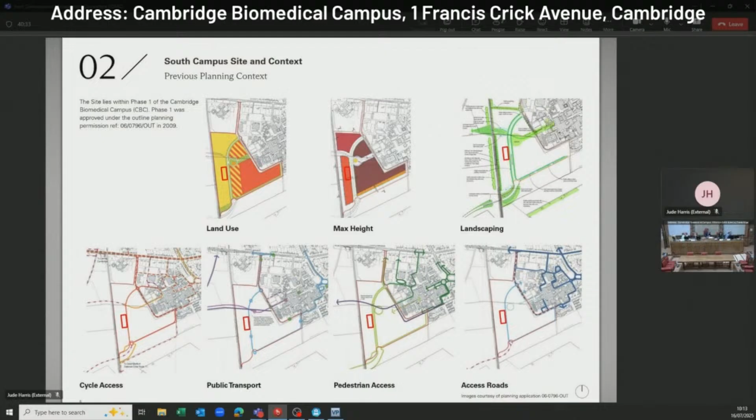Just 3 quick slides from me to place this in a planning context. The site for the building is within the area of the original phase 1 of the Cambridge Biomedical Campus, which was first granted outline planning consent in 2009, along with its parameter plans - a snapshot shown here - that have guided and controlled the delivery of phase 1 across those topics. That 2009 consent expired in 2021, which I'll come back to.

Since 2009, there is a different context. Phase 1, large parts of it now already built out. Phase 2, consented and currently being built out. Phase 3 is allocated to the south, and phase 4 is the emerging allocation in your emerging joint local plan. Just to be clear, because of the scale, you may not be able to see the key which shows this.

Jude, if you start - so it runs north to south. Phase 1 there is the large green area; that essentially is the original 2009 planning consent area. Phase 2 is the land that sits underneath Dame Mary Archer Way, the yellow rectangle - you'll see the cranes and development on there now. To the south of that is the allocation within the South Cambridgeshire District Local Plan generally called phase 3, no planning consent yet but allocated. Phase 4 is the bigger red land coming forward as the idea in your emerging joint local plan.

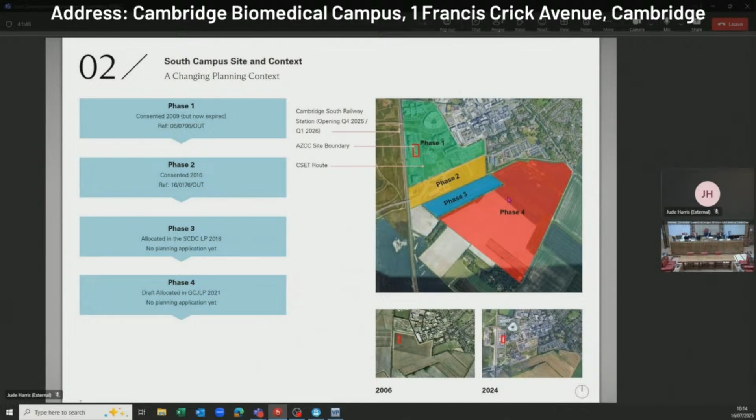The adopted and emerging policy position supports appropriate development at the biomedical campus, along with the direction given by the recently adopted SPD for the campus, which we very much note. Because that 2009 consent has expired, the proposals today will in time form a full plan application rather than a reserved matters application, as you would have become accustomed to on the campus. Whilst such a new application is no longer technically bound by those 2009 parameter plans, we're nevertheless guided by them and what they always foresaw for this part of CBC.

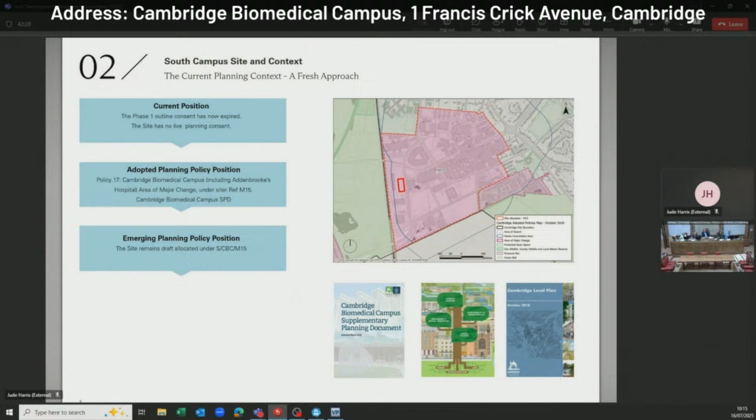Thank you, Guy. My name is Jude Harris, from Nicholas Hare Architects, and we're working on the project in very close collaboration with Herzog and de Meuron, the Swiss-based architects responsible for the DISC building, which you'll be familiar with and which has recently received a national accolade, an RIBA National Award. Thomas Ladd from Herzog and de Meuron sent his apologies today, so I've been asked to present their proposals in his place.

So what you see here is an aerial view of the master plan that Richard described, intended for what is called the South Campus. The North Campus is the DISC building. The South Campus is the buildings located on the western side of Francis Crick Avenue, between Francis Crick Avenue and the railway line into Cambridge. The building in the foreground, labelled number 3, is what we call the RFB building, the Rosalind Franklin Building. It came forward as part of a reserved matters application and was entitled the Enabling Building.

The Hub building, which is AstraZeneca's public facing facility with catering facilities that are publicly accessible and other facilities to support AstraZeneca staff, is located here as number 1.

The Sustainable Travel Hub, which contains a substantial number of cycle parking spaces and car parking provision for all of the 4,000 AstraZeneca staff, is located on the south side of the South Campus.

And the Energy and Data Centre here is number 5, which supports both the South Campus buildings, but also the DISC building with energy and data services across the campus.

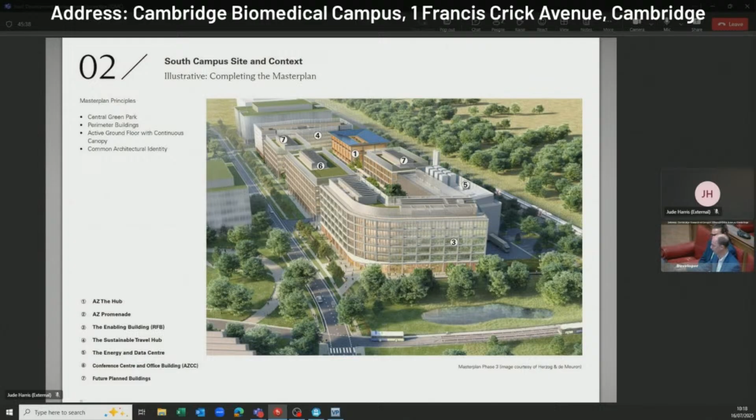So that's a little bit about the master plan and its history. In terms of looking at the site specifically, it's the rectangle labelled 6 here.

The forecourt to the station that you just referred to is located here. The DISC building is here. The LMB building you'll be familiar with is here. Royal Papworth Hospital is number 9 here. The Heart and Lung Institute was recently completed on the eastern side of Francis Crick Avenue, and we are on the opposite side of Francis Crick Avenue to that.

Number 3 is the building currently under construction on the site - that's the Rosalind Franklin building. And the central promenade area is this green strip in the middle, which we've described.

The vehicular access onto the site is very much in this southeastern corner, and then this is the sustainable travel hub that we've talked about. So that's the site in terms of its location and context.

We're obviously considering all of the various access routes around the site. You'll be familiar with the busway, which goes over towards Trumpington Park and Ride. Francis Crick Avenue is subject to the CSET proposals, which are being developed and will come forward as part of a future application. AstraZeneca have been in close dialogue with CSET to make sure that the requirements of this South Campus are not compromised by that.

And then the vehicular movement around the biomedical campus you will be familiar with, and obviously providing appropriate facilities for cyclists in terms of routes through and adjacent to the site, but in particular cycle storage on the site itself.

Deliveries will arrive via the western car parking area - people come into the site at the southeastern point, they come south of the Sustainable Travel Hub, and we have a small amount of surface parking on this western edge. Then we have a delivery facility to the west of the RFB building, which is a centralised logistics hub for AstraZeneca, and they then manage deliveries and distribution across the site via sustainable means using electric vehicles and other means.

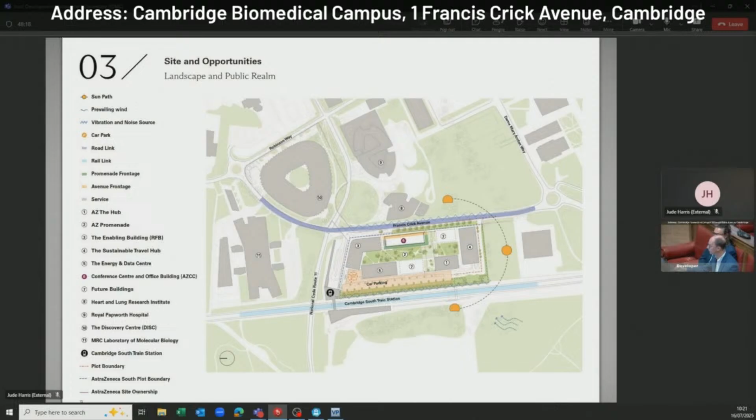So that's the landscape and public realm aspects. That's the site itself. Turning now to the process that we have been through responding to AstraZeneca's brief.

As Richard's talked about, there's very much been identified a need for conferencing and meeting facilities on the campus to enable that collaboration both with AstraZeneca staff internally, but also with the wider scientific community, both on the biomedical campus within Cambridge itself, and indeed nationally and internationally. The key part of the brief was the identified requirement for an auditorium for up to 450 people.

There are actually very few facilities within Cambridge that provide facilities at that level. The university has 2 large lecture theatres of that size, one at the Ray Dolby Centre, where we were the architects, and one at the Babbage in central Cambridge. So this will be one of 3 very large lecture facilities provided within Cambridge.

The work that we did with Herzog de Meuron was very much about responding to the brief, which is primarily a workplace building for 730 AstraZeneca staff, but with an additional function of providing this conferencing space for up to 650 visitors to the AstraZeneca campus.

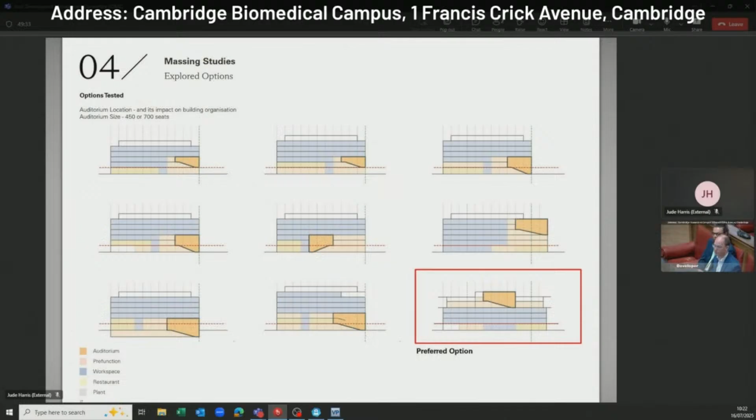An auditorium is a big volume, and so we looked at, do you put it in the ground, do you put it on the bottom, do you put it in the middle of the building, or do you put it on the top of the building? We very much settled on the option that we're going to present to you today, with the auditorium located at the top of the building as a penthouse on top of the workplace floors.

Mr. Harris, just briefly, I said you had 20 minutes, but I appreciate that's going to be very tight given the amount of detail. And if it suits you to slow down the presentation and take a little bit longer, then I'm happy to use my chair's discretion to do that. If you're happy with that, that'd be very much appreciated, Chair.

Thank you. So in terms of the site massing, the plot is about 75 metres in length and about 25 metres in width. We're obviously providing the main entrances at ground floor. The primary frontage and the access into the building will be from the west via the promenade landscaping.

You then come into the building and we have 2 primary functions: one vertical core to enable conference visitors to get to the upper floors, and one vertical core dedicated to AstraZeneca staff to enable them to access the workplace floors. You then have the workplace zone, which is shaded in blue here.

On top of the building, you have this magnificent large auditorium for 450 people, which is very much a kind of jewel at the top of the building. Adjacent to that we have what we call pre-function space, which will include breakout areas, opportunities to have poster sessions to display scientific papers, and also large meeting rooms that enable slightly smaller presentation spaces than the big auditorium itself.

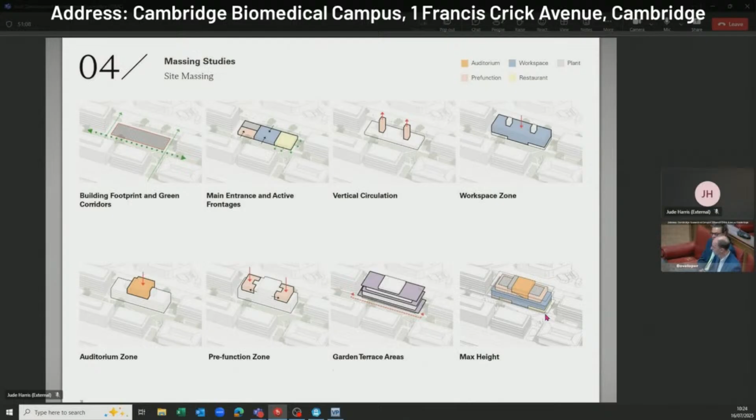You'll see from the visuals that we present later on, we're proposing garden terraces, both at the first floor and the upper floors, which provide an element of external space to the building, both for the people that work in it, but also for the conference visitors. Finally, the heights of the building, as you'll see as we present the scheme later on, are very much in tune with the adjacent massing of the master plan that was intended, both in terms of the RFB building, which is progressing for construction, but also the developing areas.

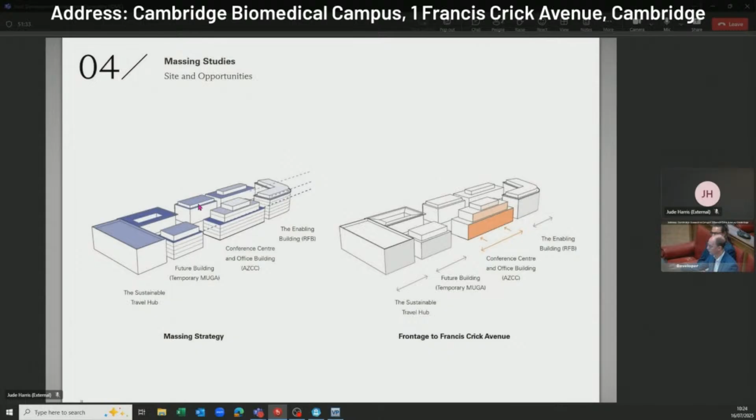So this gives a flavour of that massing. It highlights on the right this kind of frontage to the east of Francis Crick Avenue, but the massing very much complements the massing on the campus, both as constructed and as intended. You heard me talk about these two future buildings, one currently on the site of a temporary multi-use games area, and one between the amenity hub and the energy centre itself.

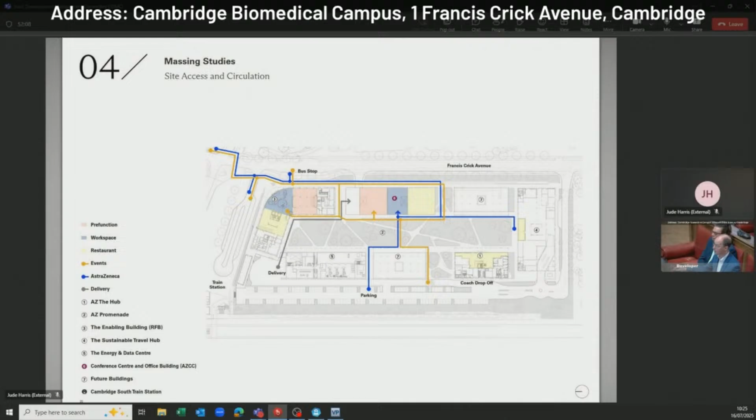We've kind of touched on site access and circulation. We have to provide for all means of transport, but deliveries will arrive in the northwest of the site and be serviced via electric vehicles to the building itself. We are assessing the implications of potential coach drop-off, although primarily this is a facility for AstraZeneca staff. There are occasions when people may be coming from outside and coach transport may be something we need to accommodate. And we're making appropriate provision for cycle and car parking as required for the numbers of people who work in the building, and the numbers who will visit.

Sustainability, as you'd expect, is a major part of both AstraZeneca's agenda and the design we'll be developing, responding both to the local authority's local plan requirements and the more global and international climate emergency priorities we're all looking at.

In terms of certifications, we are going to achieve BREEAM Excellent. We're actually looking at a pathway to BREEAM Outstanding at the moment, and the pre-assessments are looking good. We are considering embodied carbon as part of the design, looking at some timber structures as part of the developing structural strategy, and we'll be doing a whole life carbon costing exercise as part of the design.

We obviously want to consider operational carbon as well. AstraZeneca have their own energy centre that uses sustainable means of energy, but we are looking to minimise the operational energy used in the building, and we'll be doing TM54 calculations to make sure that happens. We're also considering climate resilience in terms of future climate predictions and responding to the urban heat island.

Health and wellbeing is a key priority for AstraZeneca in terms of its 4,000 staff who will ultimately be on the campus. Biodiversity will be integrated into the landscape strategy, and we're very aware of the specific water efficiency strategies and requirements for the Cambridge area. We'll be complying with the BREEAM WAT01 credits required by the local authority, and looking to see if we can improve water efficiency even further. The selection of materials will consider all of these sustainable priorities and embodied energy requirements.

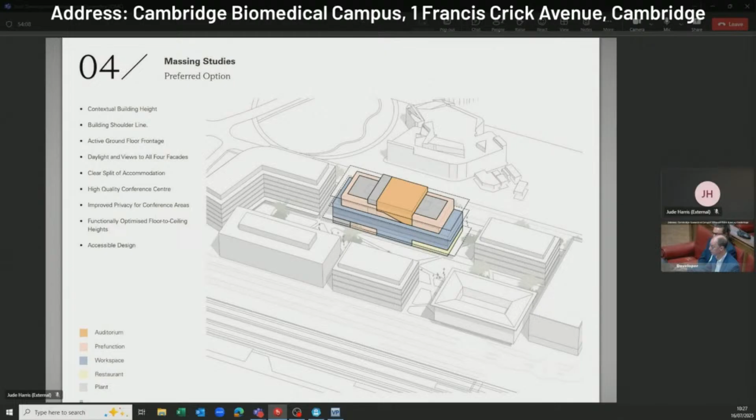So this is the proposal. These are the images that have been prepared so far. We are at very early stages, at the beginning of RIBA Stage 1. We'll be looking to come forward with a planning application around about November, so there's still some development to be had here, but this is where the design is currently sitting.

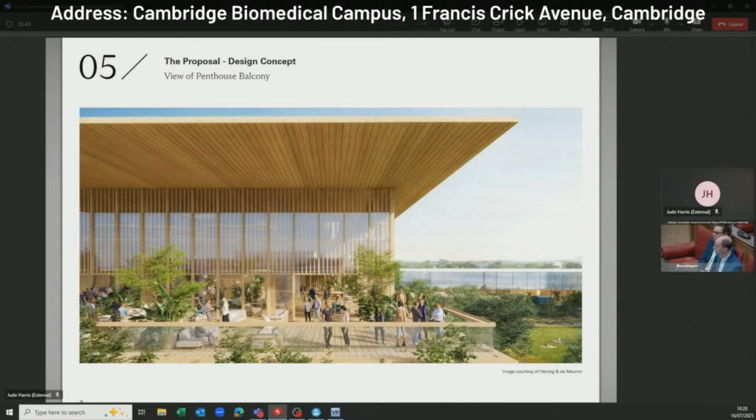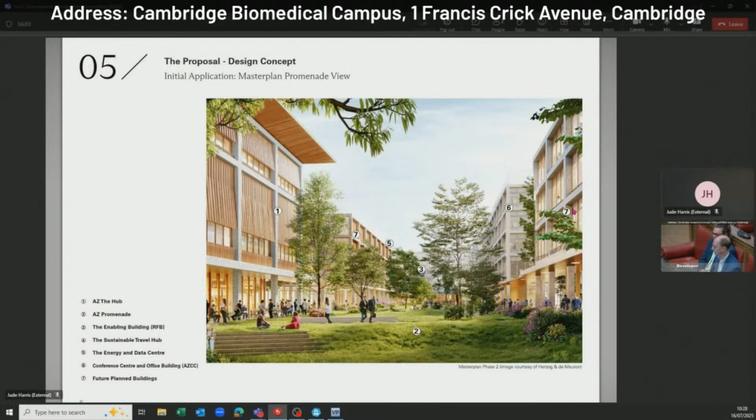And then this is a view almost from the south of the promenade. You can see the amenity hub building on the left-hand side there. You can see the future building that will come, which is labelled number 7 there. You can see our building as was intended in the master plan on the right, labelled number 6. And again, a future building that will come, number 7, on the right-hand side of that. And so this is a bird's eye view, so you can see that in context.

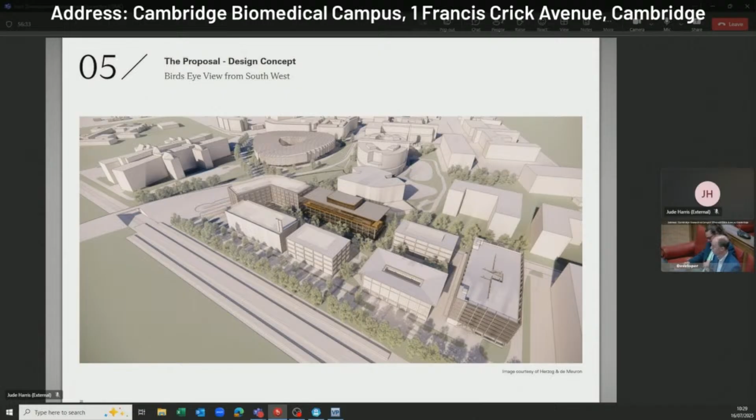So, to summarise, this is very much a continuation of the master plan, as you've heard Richard and Guy describe. We're keen to implement the intended landscape strategy for the full promenade, and indeed the landscaping and street and public realm to Francis Crick Avenue, and as RFB develops the interface with the station to the north.

We very much are responding to Francis Crick Avenue as a primary route within the biomedical campus. We are considering those through-views and landscapes and connectivity, both from within the biomedical campus, but also from the wider landscape around Cambridge, and we're doing some townscape studies to explore that further.

And this is very much a layout that is intended to optimise the potential for this conference facility as a unique facility for AstraZeneca, a very valuable facility for the biomedical campus and the other occupants on the biomedical campus, but also for the scientific community within Cambridge, within the UK, and indeed internationally.

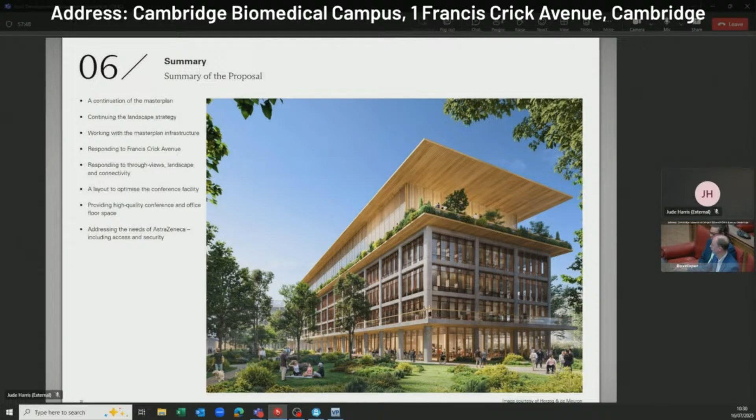And so it is, as you've heard Richard talking about, addressing the needs that AstraZeneca have identified for a building of this type, and they will need to consider very carefully the access and security strategy they employ for the building. We will develop our proposals for that further and explain those as part of the application process. So I'm not sure how I did for time, but thank you for the grace, Chair, very much appreciated.

Considering the interruptions you had, you were exactly on time. Oh, thank you very much for that. Thank you very much. Mr. Summer, if you want to just add anything to round it off, very happy for you to now do so.

It's very difficult to conclude that, actually, but thank you for the opportunity. I think that was well-rounded. Thank you, Jude. Thank you. Great. Thank you all very much indeed.

A very helpful presentation. Now, I am sure you won't be surprised that members will have a number of questions. If members would like to just indicate if they'll have questions, I'll try and note down the right order. Members, I may not have noticed in which order you raised your hands, but I'm sure you will tolerate it if I get you in the wrong order. I'm going to start with Councillor Anna Brennan.

Thank you, Chair, and thank you to both of you for the presentation we've had. That's really helpful. I have 5 questions, Chair. I'll let you decide how you want me to take them. But well, before you start, perhaps we could take 2 of them at a time.

Okay, so the first is obviously with your conference facility, you're hoping to attract a lot of people to the site because of the auditorium, and I just wondered what measures you'll take to enable that they understand how to travel to the site because of the issues there with access to the site. And I also wanted to know about disability access and parking. I know you've got your travel hub, but can you explain where disabled access and cycle parking will be? I'll stop there for the time being.

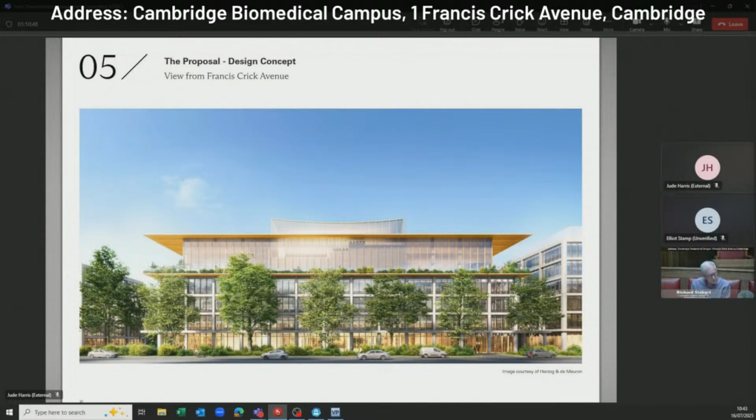So just on transport, which is where my question was going. Since the site was first conceived, Cambridge South has appeared, and now we have East-West Rail in prospect. So my first question: what is the improving rail access - and it's hugely improving rail access - having on the assumptions made about modes of travel? And secondly, on cycling - if one was to imagine cycling from West Cambridge to this site, you have to approach over the railway bridge, turn right, and turn right again across two quite busy traffic streams. I wondered if the team had any thoughts on how to make that cycle access easier, because one of the things we need to do to encourage cycling is to make access easier.

Yeah, thank you, Chair. So again, thank you very much for the questions and for your comments on the roof, everybody's comments on the roof. I'll turn to Jamie for the second part of your question. But the first part, around the impact of the Cambridge South station - we are starting to model what that impact is. We are surveying our community in August to have a better, more immediate understanding of what the impact of the increasing public infrastructure will be in terms of people working on the campus. The challenge we've had, and potentially opening up a different conversation, is we haven't yet had clarity on the train line and their stopping program.

So in some cases, trying to get to the bottom of the question we're asking our community is difficult, but we perceive we'll conclude our conversation in August, get a survey out to our community, and start reflecting on that detail. In the end, I think it's genuinely positive that we will have more of our community using public transport. As I said, our policy is not to prioritise vehicular traffic to the site at all, and to prioritise multimodal travel using the infrastructure that's available. As the infrastructure grows, we will simply prioritise more use of it. So I see it being positive - the exact nature of it, we need to wait until we've done our survey of our community.

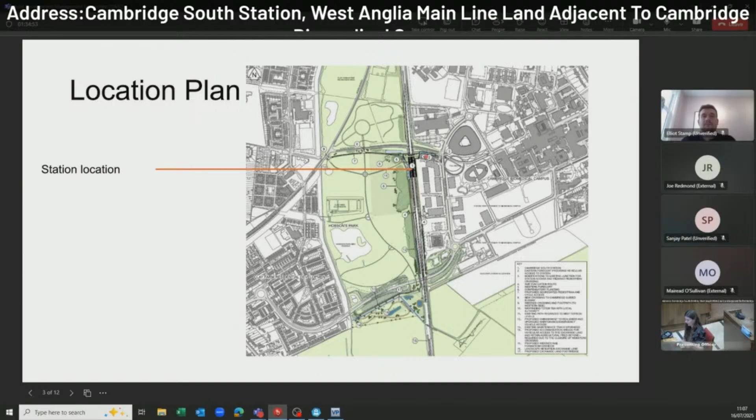A very quick refresher of the location of Cambridge South. We're in Trumpington Ward, partially within Hobson's Park to the west and the Biomedical Campus to the east. And we're interested in the western side of the station today.

So the application, the station, was dealt with as a Transport and Works Act order that was determined in December 2022. We began discharging conditions early in 2023, and then members will recall determining the station design and cycle parking conditions in August of 2023. This briefing will tie in with the station design condition.

And then there were also the landscape condition, which members determined in March, and then the lighting condition, in particular in relation to solar studs, which was July of last year, and then finally determined after a deferral in October.

To start with context setting, the application was determined as a Transport and Works Act order, and during the examination, Cambridge Past, Present and Future expressed a desire for a public toilet to be provided at the station to help compensate for some of the harm caused to Hobson's Park. The inspector in her report strongly encourages such a facility to be provided, though it was never referenced specifically as a public toilet, but rather cafe and toilet facilities, the type you'd expect at a station.

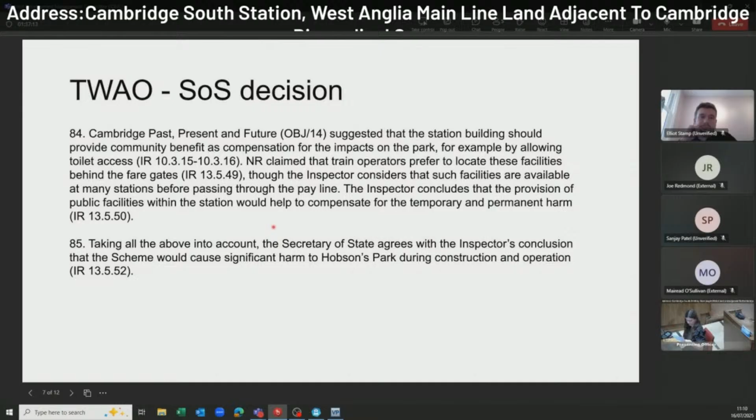So then a refresher on the station design condition. This went to committee back in August 2023. It's a very broad condition, including all the details of design for the station. At that time, the details of signage were outstanding and remain outstanding. That will be a future application, which is why this is tied in today.

At this stage, the applicant felt that it would be possible to provide members of the public with access to the toilets on the western side of the station, although they were behind the gate line.

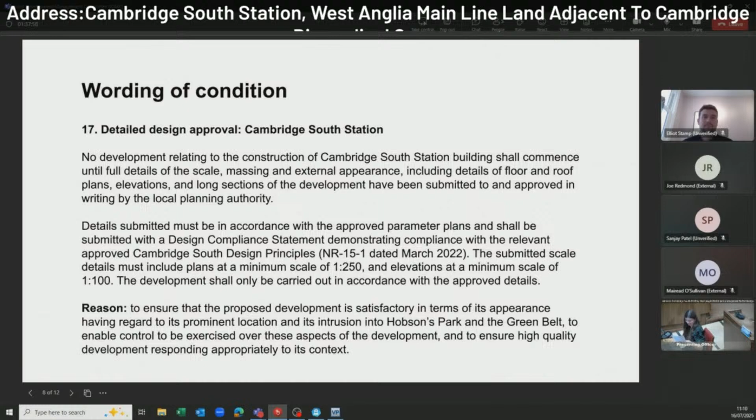So as part of the decision notice, an informative had been recommended by officers to highlight that the station signage details were outstanding and needed to be provided, and members requested an amendment to that informative to include details to signpost users of the park to the publicly accessible toilet at the station.

The applicant will cover in detail what has gone on since this decision, but ultimately, since the operator Greater Anglia came on board, it's become apparent that it's not possible to provide access to these toilets. They will go into that detail as part of their presentation.

One thing worth noting, which will also form part of their presentation, is that there is a retail unit outside of the gate line that does have the potential to meet that definition of a public facility that the inspector envisioned in her report.

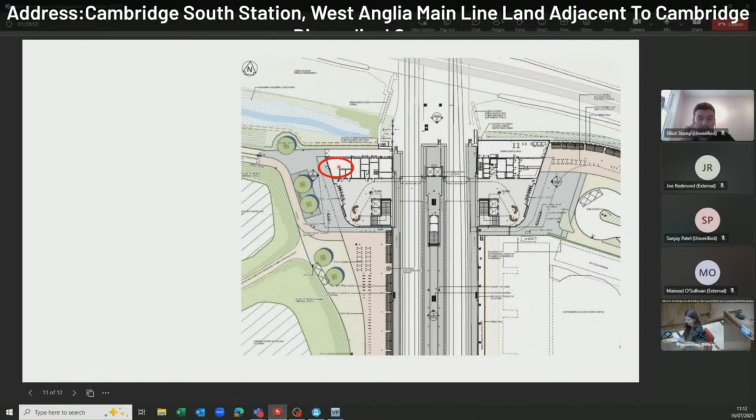So just to sum up, it's very disappointing that it hasn't been possible to provide this public access to the toilets on the western side of the station. But as outlined, there's no mechanism requiring the provision of these facilities, and there is the potential of this retail unit to come forward, which may provide some public benefits. So I'll hand over to Elliot Stamp at Network Rail, who will go through his presentation.

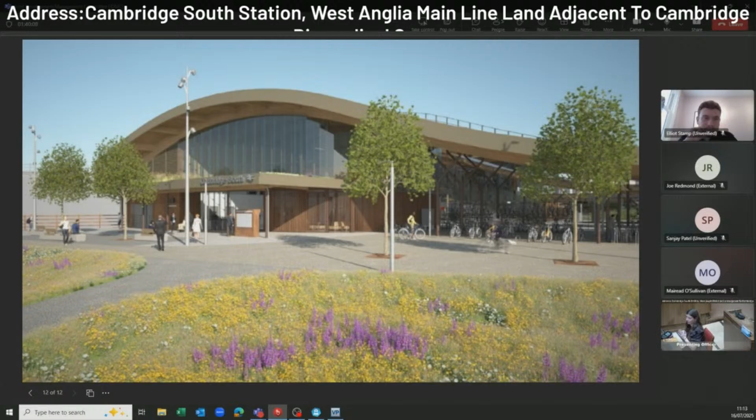Just before you hand over, I think it would be helpful to the committee, as this is a pre-application briefing, to consider as far as possible the exact nature of the application to which this relates. Sorry to not have been clearer. In the autumn we are expecting an additional application to discharge the station design condition. This will deal with the outstanding signage information, that informative I mentioned. That's the reason for the pre-application briefing, because it's very likely this station design condition will be before members later in the year.

Just before our developer joins us, Councillor Bradnam. Thank you, question of clarification. Thank you very much, Mairead. Helpful to have that photograph up.

I'm looking at, in the Network Rail presentation, something called Proposed Alternative Public Facility. Is that envisaged on the Hobson's Park side of the railway with a cafe and public toilet facility, or toilet facilities associated with the cafe? Or is it on the left-hand side of the station approach on the east side of the railway line?

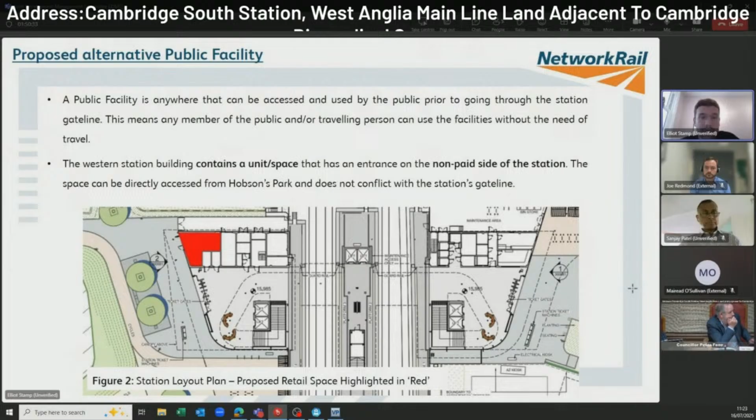Here's another CGI image. Mairead's image was a bit better than mine, but hopefully you can see on the left-hand side the entrance to the proposed retail unit, which can be directly accessed via Hobson's Park. Then to the right, you've got the gate line and main entrance to the western part of the station.

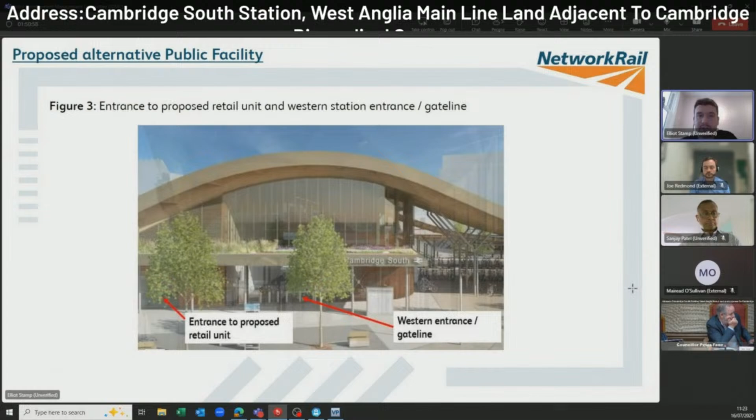Coming back to the Transport and Works Act order and the inspector's report, as Mairead touched on and as set out in the paragraph she showed earlier, the inspector isn't prescriptive about what type of public facility should be provided at the station. It explains that facilities such as a cafe or toilet facility could be provided, and both the inspector and the Secretary of State, when approving the application, had the opportunity to set this as a requirement as a planning condition as part of the deemed planning permission.

They both had the opportunity to do that, but they didn't elect to take it, and I think that's quite important. We've got a lot of other conditions attached to the scheme, but this wasn't one of them. We feel that the retail use in the location shown would provide a public facility that delivers additional benefits for users of Hobson's Park, local residents, or people visiting the hospital or returning from hospital visits. We believe this would mitigate the impact of the Cambridge South Station project in line with the Transport and Works Act order decision, and also the encouragement from the planning inspector.

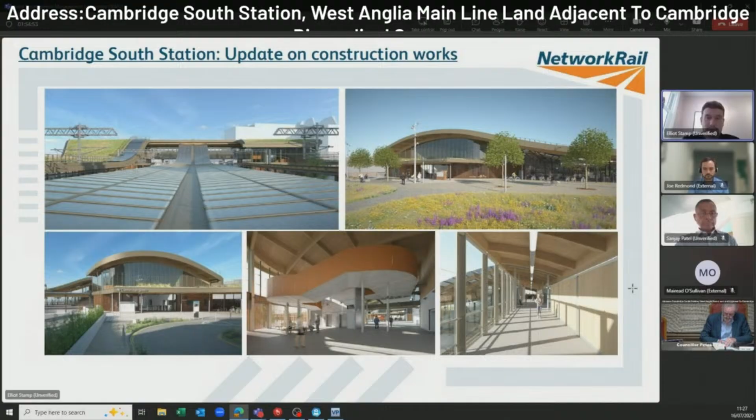And just finally, I haven't spoken to you all for some time, I think since October, and some of you may not have been in the area, or some may have seen the great progress which has been made at the station. I was on site a few weeks ago, so I thought I'd provide some live, or maybe a month old, construction images. I know Mairead shared some of these as well in her presentation, but as you can see, the works are progressing really well.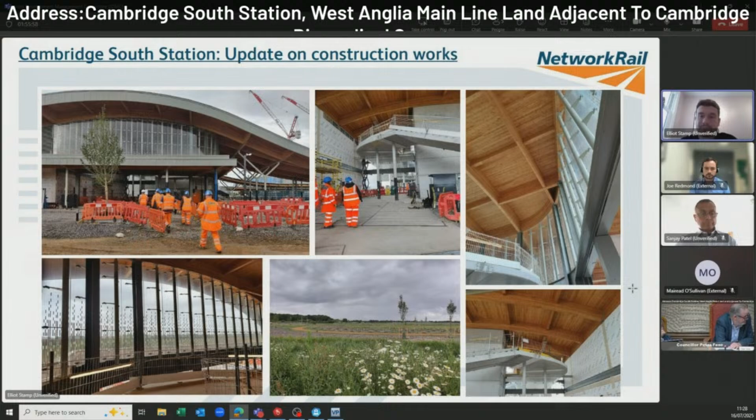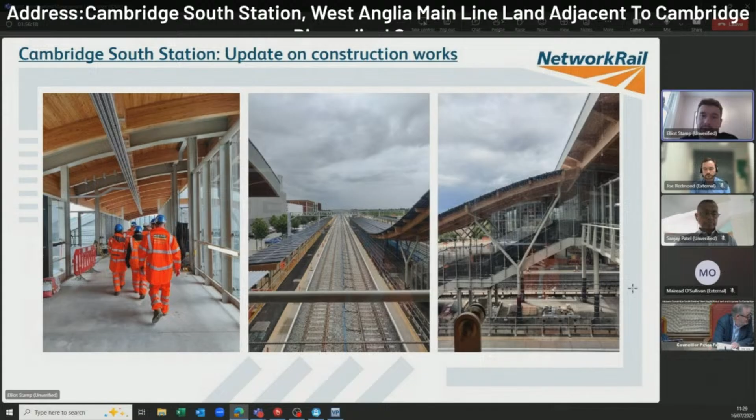And just finally, some good images of the overbridge. And again, in the images on the right-hand side, you can see the PV on the canopy roofs, the solar panels, very flush into the design, into the curving element of the canopy roof.

So that's the end of the presentation. I'll keep it up in case anyone's got any specific questions to refer back to any of the slides. But yeah, happy to take any questions you may have.

Thank you. I have questions from Councillor Katie Porrer and Councillor Anna Bradnam, and I'll have a couple of questions myself. Just before we get into questions, I just wondered whether your colleague Joe Redmond from the DFT wanted to comment at all, given the context of the inspector's earlier findings.

Thanks very much. Yeah, I think so. The department's position is we're supportive of Network Rail and Greater Anglia's position. We did speak to our Transport and Works Act order colleagues at the time to try and clarify the point around the planning condition, and they confirmed it's not an explicit requirement - there was just an encouragement for some kind of public facility. I think we're confident that through provision of the retail space, that will be provided. It's a shame we couldn't get the workaround in place, but the bylaws are there for a reason, so we're supportive of maintaining that consistent approach at the station.

Thank you, Chair. I am frustrated by this - I think I will try and moderate my language. I was sat on when we discharged these conditions, and the toilet was put forward as a benefit to offset the Greenbelt take. And one of the reasons I voted for the discharge conditions was because the toilet is a huge asset.

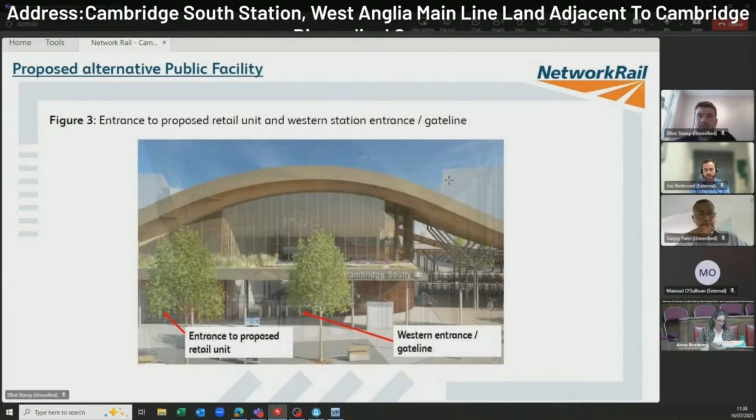The second thing is, if you could just move on to the next slide, which shows the proposed alternative facility. This slide shows the proposed station access on the west side of the railway station, but then elsewhere, if we go to slide 10, it shows the access on the east side. Now, for anybody travelling in Cambridge, people come from all over the world and all over the locality to get to Addenbrooke's Hospital and this Cambridge Biomedical Campus site, and I think you will agree that the two sides of this station look quite similar.

They both have a curved roof, and all I would suggest is that the signage needs to be very clear as to where people are. I know you can go through once you're inside onto the other side of the station, as you can in all railway stations, but I do think it might be helpful if the side that points west says something like west platform or west, and the east side says east, so people know where they are arriving, or maybe northbound or southbound, so people know where they are and can navigate easily. I don't know what standard railway signage might enable that, but I think it might be helpful if people understood which side of the railway network they were approaching.

Thank you. Elliot, any further comment on that?

Coming back to the first point about the clarity around my statement that the inspector and the Secretary of State had the opportunity to add a condition: as part of the Transport and Works Act process, we engaged with Greater Cambridge Shared Planning to discuss potential conditions. There was a session within the public inquiry to agree on the conditions if the Transport and Works Act order was to be approved, as it was. But also the inspector themselves had the opportunity to add to that condition list, and the Secretary of State also had the opportunity to add at their time when reviewing it. So that's what I meant, they had the power to add conditions if they saw fit.

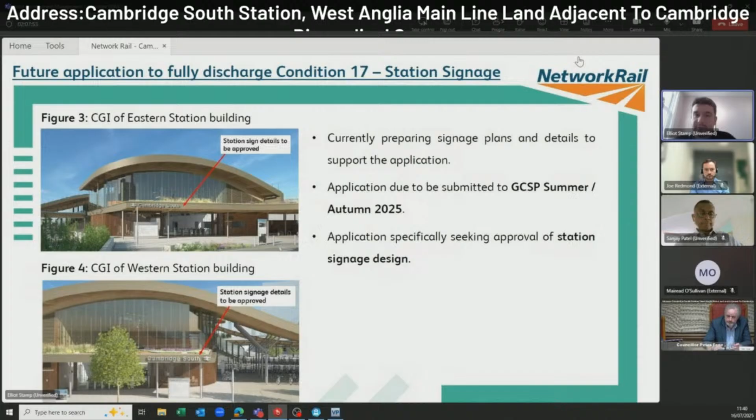The second point about the toilet: the toilets you're referring to are the toilets within the station on the paid side of the station. The retail unit itself, as I said earlier, will still need to go through the tender process, so we don't know the tenant who will be going in there and whether they will want to provide a toilet or not. That's still to be determined as part of that process. But the toilets, as you can see, are the toilets for the station behind the gate line.

So, if I may, for clarity then, if any tenant were to take on that red site, they would need to provide provision within that for a toilet that the public could use. Potentially, if they require that—the tenant specifically isn't chosen, so it's whether they, as part of their offering, believe they want to provide a toilet, they would have to provide it within the red area.

As Councillor Porrer said, do you think there's any mileage in seeking a requirement to provide a toilet? It's a GA process, so we don't have that control. We wouldn't have the ability to impose that onto GA to require it of their tenant, but it's something we can strongly encourage. Sanjay, I don't know if you've got anything to add. Yeah, I agree with you, Elliot. I don't know if we have any power to insist that a toilet is included as part of the facility that GA leases to a tenant, but we can take that to GA and let them know the committee's feelings on this.

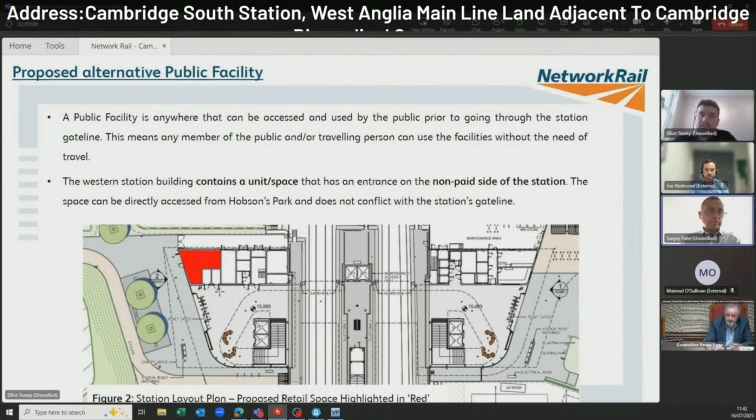Thanks, Sanjay. And then finally, just on the last point about wayfinding within the station, for helping people go out the correct side. We submitted a wayfinding strategy as part of condition 29, the landscaping condition last year, which set out that there would be information to help direct people out of the station to the appropriate area, whether they want to go west to Hobson's Park and Trumpington, or east to Addenbrooke's, the hospitals, or the biomedical campus. So that is provided within the wayfinding strategy.

That's not quite what I meant. All of that would be necessary, but what I was saying is when people approach either of these station buildings, they just say Cambridge South on both sides. I'm saying it should say Cambridge South West, or Cambridge South East. I'm sure that's something that can be taken into account before this comes to the next stage, which is specifically the signage. Which is why I was asking.

Now I have further questions also from Councillor Richard Williams, Councillor Stobart, and I think Councillor Porrer or Councillor Illingworth and Councillor Smith would also like to ask questions. We're about 13 minutes, halfway through our question session, so perhaps we could all bear that in mind.

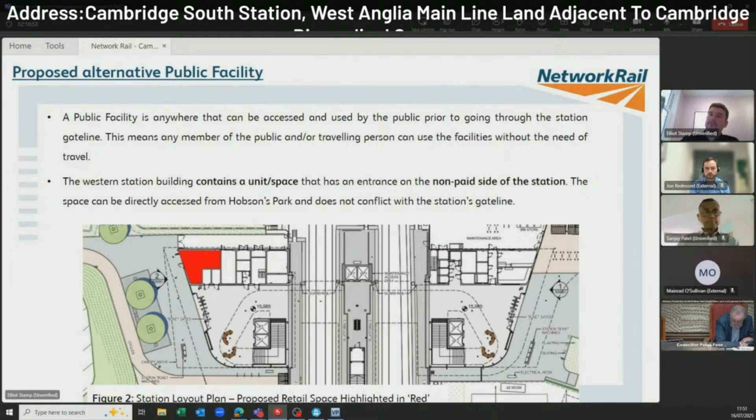Then, as to my own question - it is presumably still possible that the retail unit or whatever, currently being negotiated by Greater Anglia, might be, for instance, a cafe.

I can see that for people approaching the station from the west, either they will have or be intending to buy a ticket, in which case they'll be able to use all the facilities, or if they do not have a ticket, they're more likely to be interested in the use of toilets than in retail facilities. They probably won't have walked across Hobson's Park in order to access retail facilities outside the station.

I think that as far as this committee is concerned, it may be naive, but we would hope that, having noted the concerns of members, it will be possible in the next few months to give very careful consideration to whether there might be some way of accommodating those concerns, bearing in mind that this comes from local members based on consultation with those in the immediate area. We are conscious that Greater Anglia's relationship with government and with DFT may be changing slightly in the next few months, and that perhaps this might enable fresh thinking to be brought to bear, no doubt on bigger issues than this.